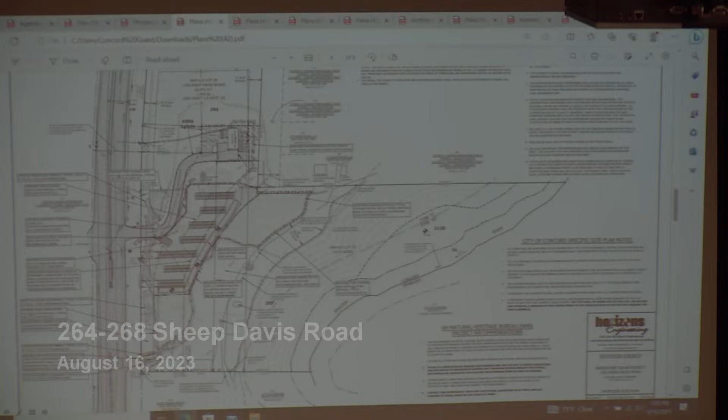In your response to comments, you provided a solar coverage calculation and indicated 5,600. Yeah, that sounds about right, because if you look at the top, that's our building, just under 900 square feet. Scott, scroll the sheet to fill these gaps. Keep going up this way. Other questions from the board?

Jeff: Can you go to the landscape plan for a minute? I noticed along 106 there are some gaps in the landscaping, and I'm wondering if that's something you can fill in, so from 106 you're not gonna really have a sight line of the arrays.

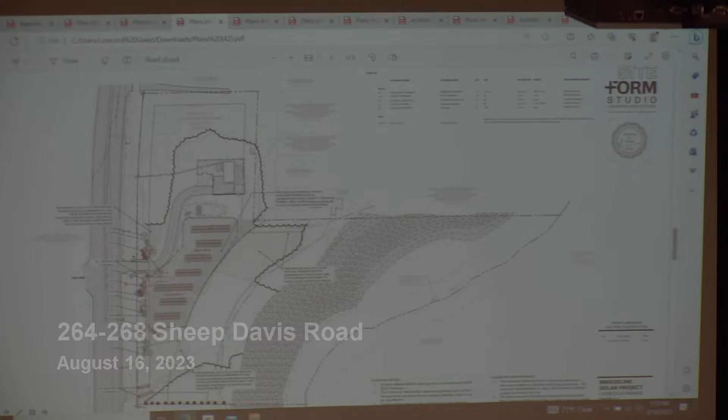Oh, you mean to block it from view when you're driving? Correct. Yeah, that's not a problem - we had planned to put a buffer, just like we have a buffer in front of our building right now. The only other thing I would mention is that technically this constitutes a change in use, so you will have to go back to New Hampshire DOT for a change in your driveway permit.

Because originally you just had the building, but now that you're adding all the arrays, it's considered a change in use. It may just be a simple amendment letter, and you may not have to do much, but that is a DOT road, so they do have jurisdiction for permits as well as the cities.

Okay, we'll go check with them. I didn't know that. And Alex, what was the...

The stormwater runoff that they mentioned in the letter from Pembroke was just that the stormwater review be included and reviewed in the project, with particular consideration given to controlling the runoff from the panels. Was that addressed, or is that in the notes at all?

So the staff has not had an opportunity to review the stormwater report submitted with their AOT application. I don't have great concern due to the flat landscape of that land, but we haven't reviewed their stormwater report yet.

So you don't handle runoff, right? It just runs off the panel and drips onto the ground? It's not channeled away or anything? No. And there's no rock or anything underneath? No. Okay, can I add on to that?

As part of the AOT design, we do have a small swale, right now it's 6 inches, below the arrays. The intent is to grade it towards that so most of the water will infiltrate. So we are meeting the pre-development conditions - we're not increasing any of the runoff. If that makes sense. Okay, that does, thank you.

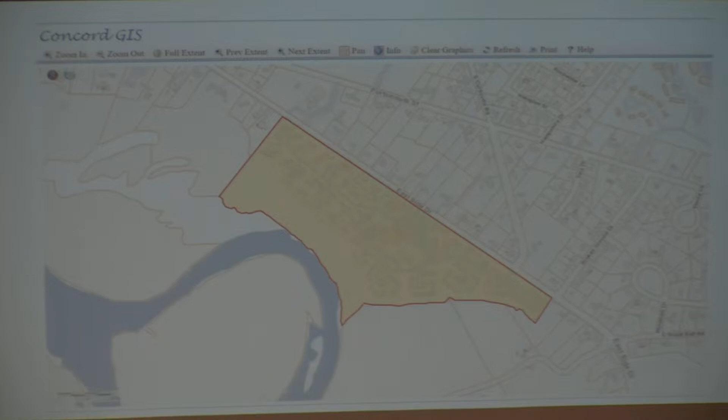Perfect, thank you Mike. So just to orient everybody, if you're not familiar, this is Havenwood Heritage Heights. It's 35 acres located on East Side Drive in Concord. The north end redevelopment took place around 2014-2015, where they redeveloped the entire north end of the campus from the Barrows building, which is basically the center of campus north. Then in 2019, early 2020, we were before you for phase one of the south end. So basically, Havenwood is looking to carry that same redevelopment message through the south end of the campus.

So we wanted to walk you through the master plan. The south end, they were not able to tackle in one large chunk. There's a lot of financing as well as resident management that goes into that. So Havenwood has done a lot of very thoughtful planning as to how they can tackle the south end of the campus. They started with phase one, which was completed in 2021, and those were the 3 buildings on the southernmost corner. Now we are proceeding with phase two.

There's basically a road that runs through the campus, and that's going to remain. But today, the buildings are designed around a central parking lot. For example, the driveway is here, and there's a parking lot in between buildings 38, 39, and 40, and the same thing with these pods. What we'd like to do is continue to provide a streetscape and continue the neighborhood feel that we developed in the north end. So in phase two, this building right here is building 41, which has a parking lot, and we're going to redevelop everything so they're fronting on these roads.

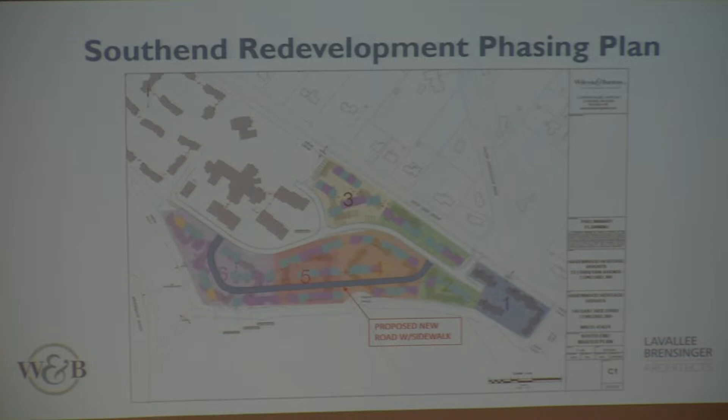So you're going to see on my plans that we're starting to build the beginning of that road in phase two. When we come back through in phase four, we'll build the next portion of the road when we develop that phase, and so on. So we wanted to give the board an idea of where we're going. It's very thoughtful and planned out.

All right, so phase two. There are 3 buildings that are part of phase two: buildings 41, 45, and 46. Like I said, they all have frontage on that main road. We are reducing the number of units from 17 down to 13. Building 41 will have 5 units. Buildings 45 and 46 will each have 4.

There's been a lot of detailed planning that's gone into each of these buildings in terms of providing zero clearance at each entrance, front and back, and providing as much daylighting as possible. The detailed elevations really call out those features, but I'm going to walk through what's really important on the site.

Each building has a front porch. Each building has a garage and 1 parking space in front, so each unit has 2 dedicated parking spaces.

In the rear of the building, each unit has either a patio or the ability to create a screen porch. You'll see I've highlighted these - the blue are the individual patios or screen porches. In the center of each double building is an entrance for maintenance folks, specifically designed so they can enter a separate entrance and go directly to the basement without walking through the resident units. That's been very well received by residents of the phases already completed.

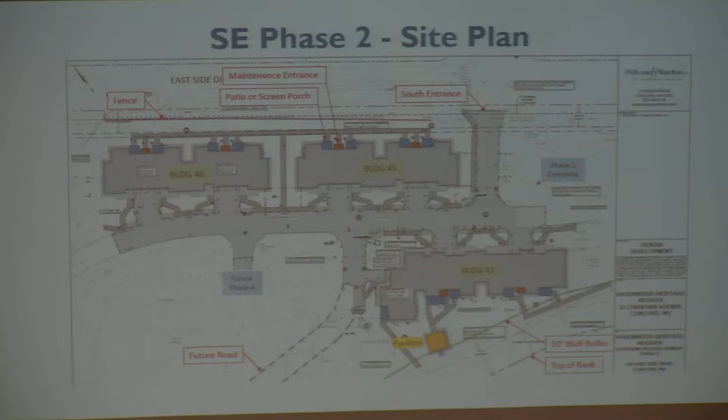And this is the beginning of that spur road that we talked about. We're bringing utilities down it. We've planned for it in all aspects of the project.

Stormwater, we are reducing our runoff in the post condition. We're looking for every opportunity to reduce the amount of stormwater flowing out to the city system. Admittedly, we don't have a lot of room underground to build a large gallery.

In phase 1, we were able to disconnect completely. The main road is still going to be connected, but we are building 2 infiltration galleries flanking Building 41. This one has been upsized to account for runoff from this future road.

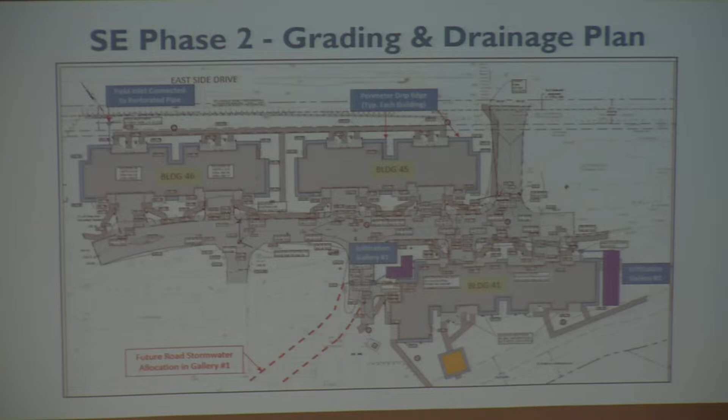Each of the buildings is surrounded by a perimeter drip edge, so as much as possible we're infiltrating all of that stormwater. You can see a drip edge will go around the pavilion, so there'll be no runoff from that heading towards the bluff. It will all be infiltrated on site.

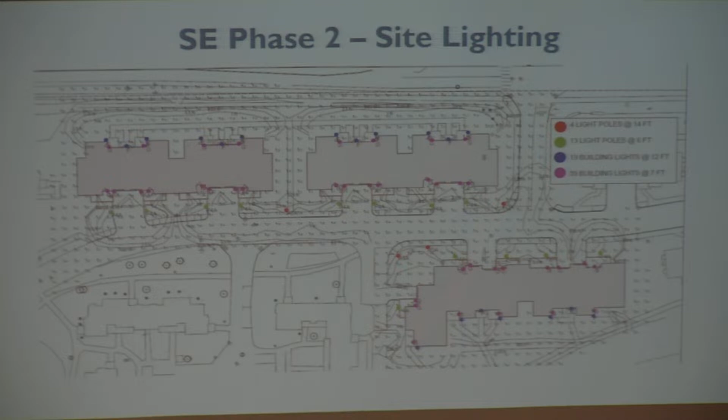There are small lights that you see in blue at each of the doors, sited on the porch or onto the patio. And then there are some other building lights. They are all consistent with the city's lighting requirements.

There's a detailed landscaping plan. We can go through it, but certainly the idea is for it to replicate what was installed in the north end and in phase 1. We have the same landscaper and the same landscape architect on the team, so all of that continuity is incorporated into phase 2.

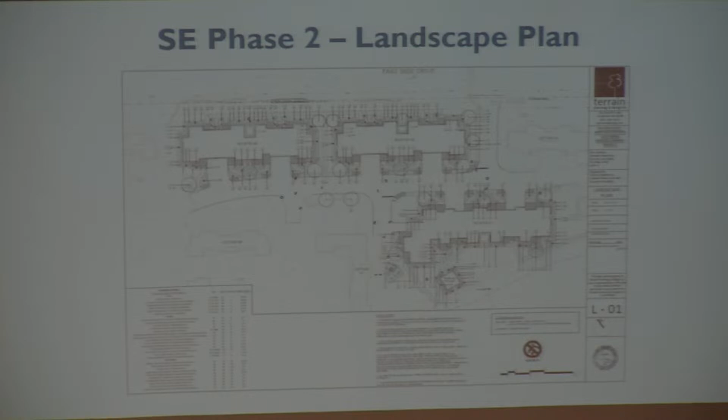As we mentioned, we do have the conditional use permit for the sidewalk. While we are putting in new pavement, we are reducing the total pavement in the buffer by about 95 square feet. We request to defer the curbing along cottages 39 and 40; it would be put in during phase 4.

And we request a waiver to not do a color rendering that showed landscaping. Lavallee Brensinger did a wonderful job of providing colored renderings, and they do a wonderful job of depicting the building, but they don't show the proposed landscaping.

I just wanted to bring to your attention that the project was granted 2 variances. The buildings are separated by 30 feet where 40 is prescribed; they are fully sprinklered. And lot coverage is allowed to be up to 65%. At the end of phase 2, we will only be at just under 48%, so we're still below that.

But we have it planned out, and with the extent of walkways, the buildings are a little bigger. We count the stone drip edges as lot coverage, and we did get relief for up to 65%.

And with that, I'd be happy to answer any questions.

Looking downstream to phases 4, 5, and 6, I'm just trying to picture it using the colored document in the supplemental packet that shows all the different phases. Are you going to have fewer units? Yes. Bigger ones? Yes, they're all a little bit bigger in order to accommodate a garage as well as a basement, and we do reduce the units slightly.

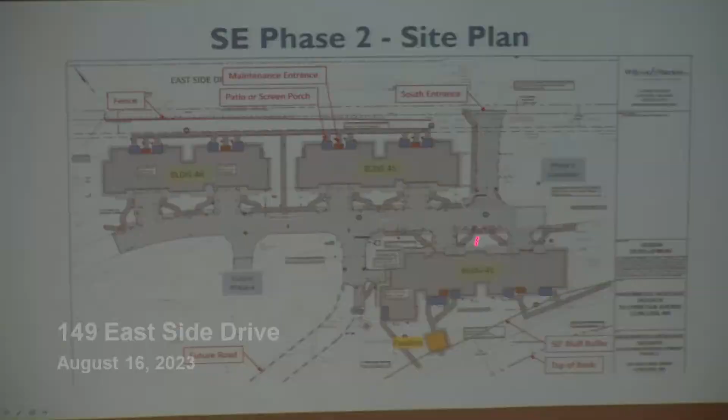On your grading plan, the two ramps in front of building 41, next to the two driveways, it appears the grade at the curb and the grade at the bottom of the ramp make the water drain toward the ramp rather than toward the road. Can you tell me which ones? I'd love to check that. Around station 0 plus 25 right and negative 25 right, the grading at the curb line is actually higher than at the bottom of the ramp, so it looks like the ramp is pitched back toward the sidewalk rather than the other way. Just work with engineering to make sure that's fixed—I'd hate to see you build it and have a puddle. Yes, as would Cobhill. I will make sure that's corrected.

And that's it. Other than that, I love the buildings that are out there. I like what you've done—I think it cleans it up.

It looks nicer, so I applaud you for continuing that plan.

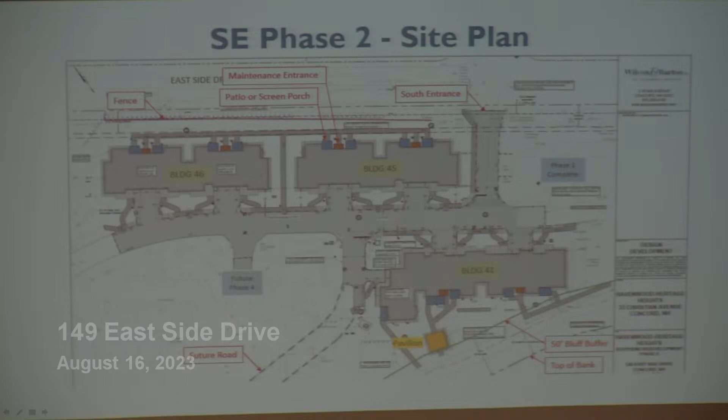I saw a note in the system to provide spot grades for the proposed pavilion site. Yes, we'll do that. The pavilion is the building right behind Building 41, adjacent to the perimeter walkway. It's a 20 by 20 pavilion. We'll make sure there are spot grades around it, but it will have a drip edge all around it, so it will capture all of the runoff from the roof.

Okay, I see another hand. No? Any member of the audience have any questions or concerns about this application? No? Seeing none, we'll close the public hearing. Thank you very much for your testimony.

Okay, so there were lots of technical review comments, and I think most of them have been addressed or are in the process, right? Yep, the applicant did provide a resubmission between the DOC and now, which took care of a lot of them, and anything remaining on the report would still be yet to be resolved.

As mentioned in the comments regarding ADR, in your packet under the architectural design review comments, ADR recommended approval as submitted. The committee did recommend the applicant consider adjusting the sidewalk along East Side Drive to have some curvature to it. I think we heard testimony why that's a bad idea, and unless there's some discussion about that, I'm going to say we strike that from the recommendation for ADR.

All right, so let's move on to our recommendation, section 6, 6.1, determination of the findings of fact. We'll use the findings of the information that was presented here tonight, the documents and content in your packet, as our findings of fact.

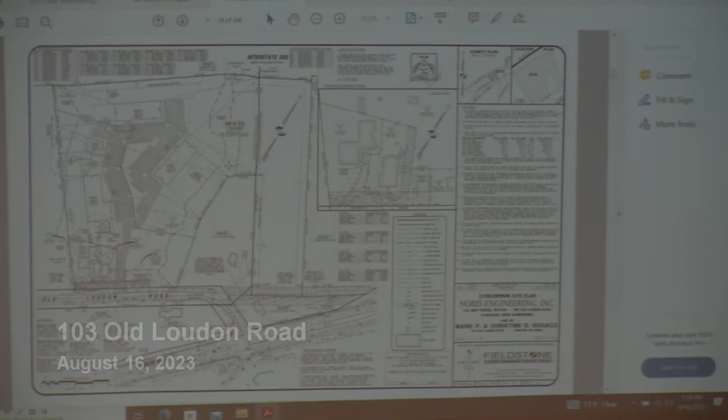So our site is located at 103 Old Loudon Road. Currently this site has three existing buildings: a small residential house, a barn which also has a small apartment to it, an in-law apartment as they call it, and another barn to the east. Our site has a brook that runs straight through the middle, down this way, and goes out under a culvert through Old Loudon Road.

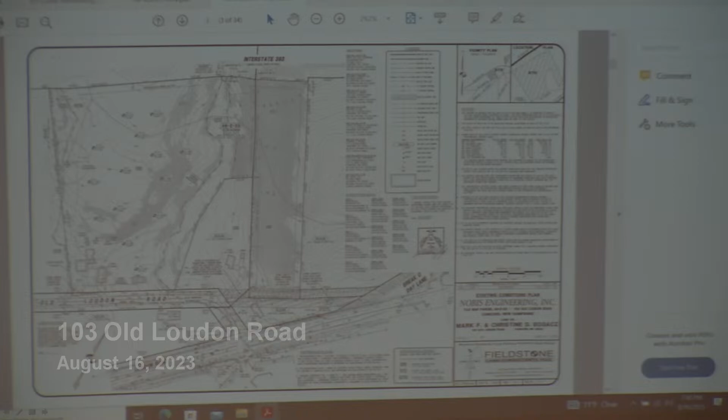The entire site is kind of this awkward shaped little thing with a little cutout right here. We are also bounded on the west with another wetland area that has a 50-foot setback, and the brook that runs straight through our site has a 75-foot setback.

So we are proposing multi-family dwellings. This will be a phased project. The first phase will be building A, which is this L-shaped building, and building B, which is the clubhouse. Phase 2 will be building C and building D, which are both 30-unit buildings. The three existing buildings near the street are going to remain as is. They are historic, and we are proposing to do land condo units for these.

We have an existing proposed driveway going up to our site, circling around, and going back to Old Loudon Road. We will be removing one of the existing driveways to the houses on the east side to provide separation between the driveways.

Also, just want to mention that the first phase is 38 units. Those will be affordable units, with 10 of them being market rate, and the balance will be affordable. In the second phase, the 60 units are all affordable housing units within that area.

This project is somewhat similar to the project we were here for back in 2021, Rail Yard off of Langdon Avenue, which is under construction now and is planned to be, we're in the process of leasing it up now. We should have occupants in that one probably end of September, first part of October.

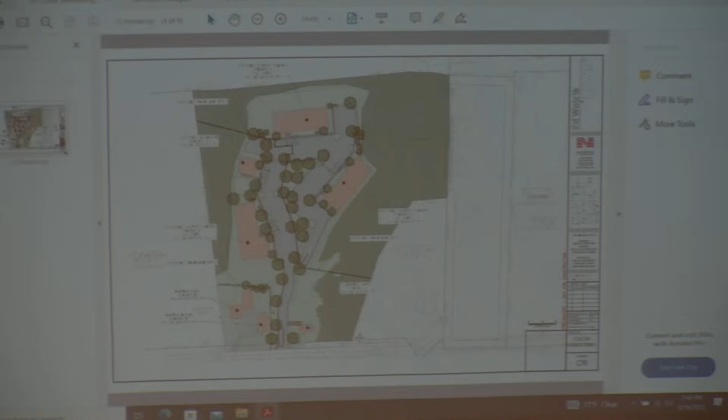We are also asking to pay a fee in lieu of constructing a sidewalk along the frontage per section 21.02. It would be ideal to have sidewalks connect to the main sidewalk on Loudon Road, but there is a significant brook that runs through our site and culverts that cross Old Loudon Road, which create an obstacle to creating a sidewalk, and we don't know which side would be best for a sidewalk in the future.

I also want to point out that we went to the zoning board and received 2 variances. The first was Article 28.21.4J to allow multifamily dwelling units in this district. The second was Article 28.4.5 to increase the density to 21.07 units per acre, where 12 units per acre is allowed.

I will briefly go over the site plan more in depth. So like I said, we have 3 buildings: 38, 30, and 30, with a clubhouse. We have a playground area next to the clubhouse, and associated parking spaces all along. Dumpsters are over by building C and D. We have sidewalks that connect all of these spaces to the clubhouse and all along the driveway.

This is our turning motion plan. This just shows the Concord fire truck turns that go in and out of our site.

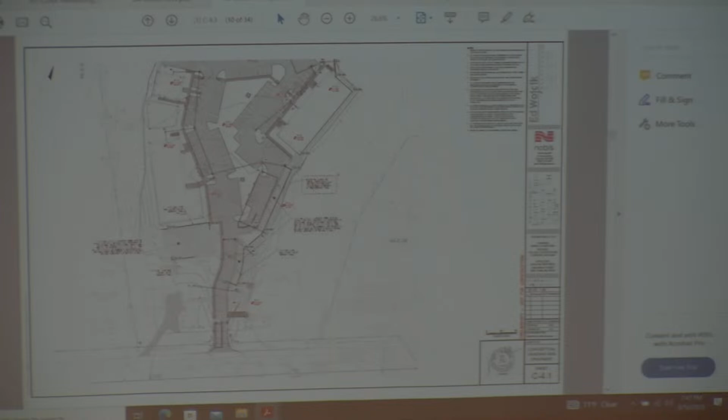For future grades, for the additional 49 parking spaces with our conditional use permit, these are designed to be porous asphalt, and we will be proposing multiple retaining walls along here.

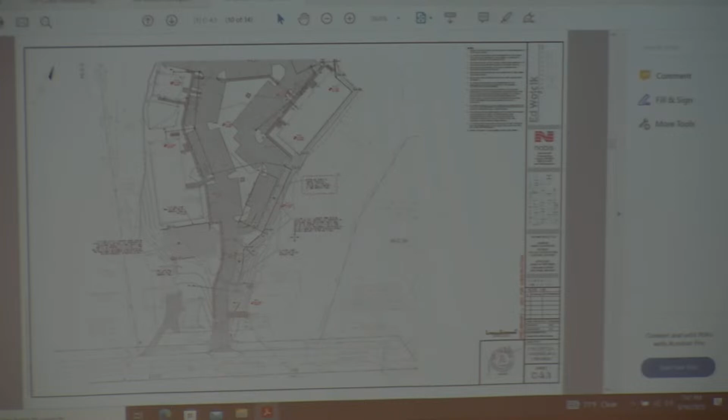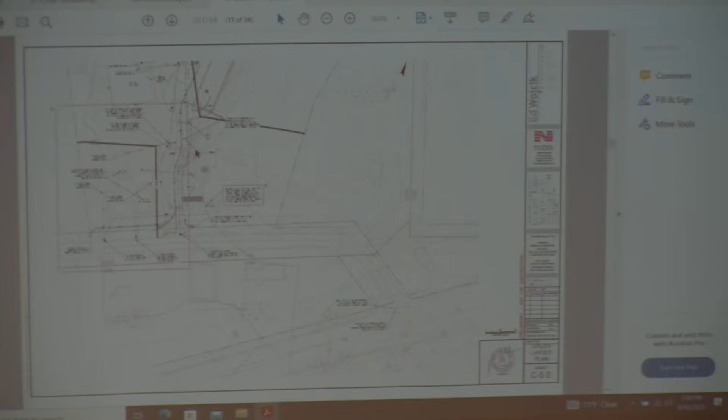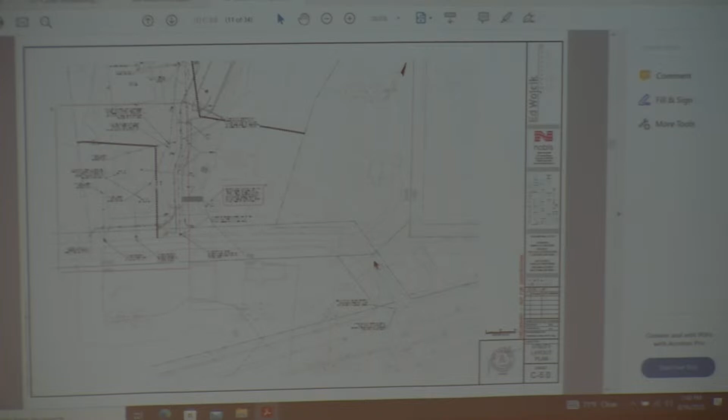For the utilities, we are providing connections to city sewer and water, as well as electric and gas, with propane tanks for gas. All the condos will have separate connections for sewer and water. Since there is no existing sewer within Old Loudon Road, we are proposing a force main to go from our site to the existing sewer manhole within Old Loudon Road. This is due to the fact that there are multiple culvert crossings in the road - an 18, 12, and 30-inch culvert crossing - which prevent us from doing gravity sewer.

Then I'll go to the landscape plan.

And here is the landscape plan. We are proposing large shade trees all around the perimeter of the parking lot, inside the landscaped areas. And we are also providing a tree barrier screening between the existing houses to remain and the proposed development.

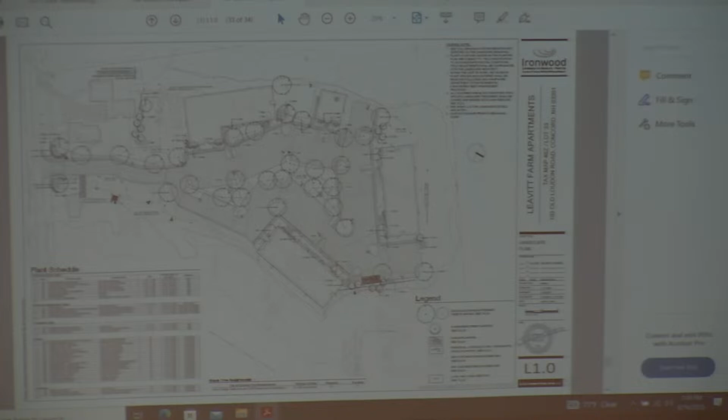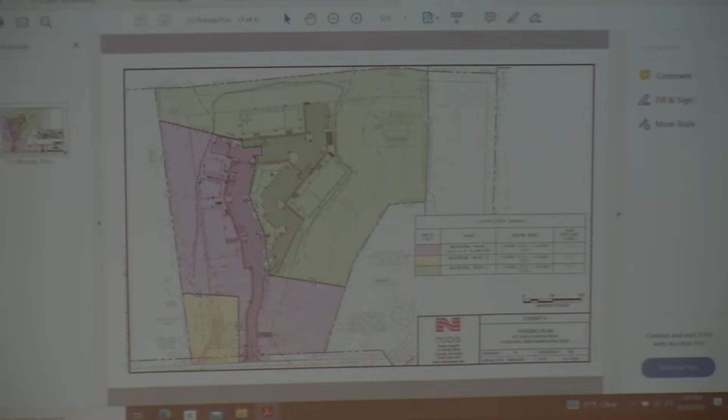I think that's it. Here's a better image of the phasing plan that's in color. So the purple is phase 1, green is phase 2, and the yellow is phase 1A, which will happen within phase 1, and that is the removal of that existing driveway to the east and connecting those two buildings to sewer and water.

And there was also a comment made about views from I-393, if that was going to be an issue, and here's a graphical depiction of the road. I don't know if I can zoom in, there we go.

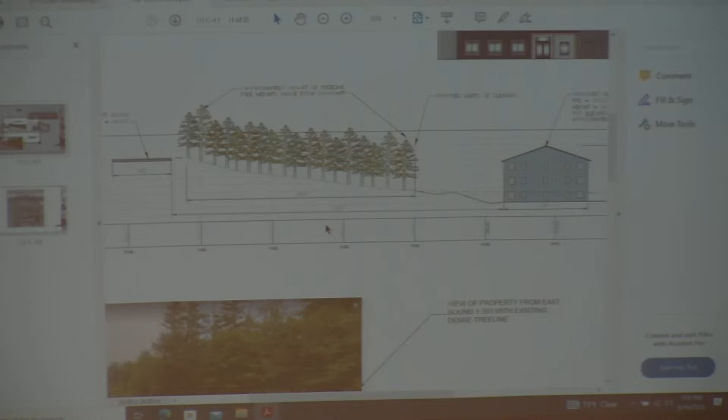So I-393 is up at approximately elevation 404. This was using GIS information. And there's a significant tree buffer between I-393 and our proposed development. There's approximately 160 feet of tree line that is going to remain. And these trees, as shown in the photo below, range from 20 to 40 feet throughout. It's a very densely forested area. And then this shows our proposed building C, which is this building right here. So there'll be a nice buffer, and these people will have really nice apartments looking out at the woods, I think.

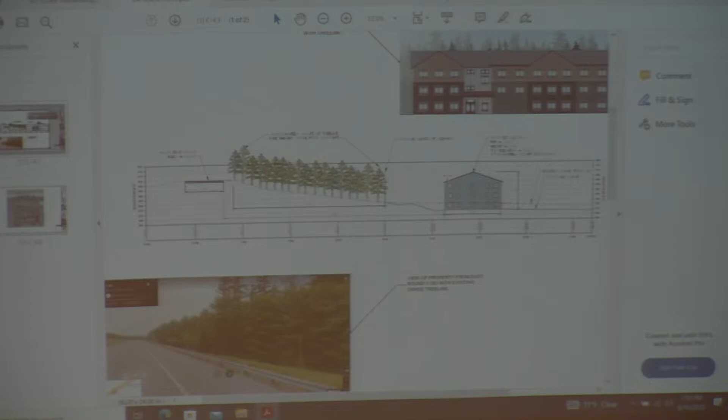Okay, so yeah, that's my spiel. Great, thank you for your testimony.

You said 93, do you mean 393? 393, sorry, yes, 393, yeah. See, you said 93, I'm sorry. Yeah, if you see 93, I'm looking at the wrong map. Looked at the wrong map.

And I had one follow-up for staff. The connection to city sewer, is this involved with the capacity issue up there? Yes. Okay, thank you. Well, it's adding to the capacity issue up there, but they're saying that they're gonna have to pump because they can't do it with gravity. Right, we've got a bigger capacity issue. Those are two separate issues. Yeah, two separate ones. I wish it was gravity, but unfortunately, we have to go with a force main.

Yep, hit it, Jeff. So on your turning movement plan, I'd like to see you have a fire truck making a left into the site and a right out of the site, because the station on Loudon Road, my guess is they're gonna come in at the other end of Old Loudon Road rather than having to go through all the different signals to get down here. You only show the left in, the right in and the left out. So if you could also show the other side, because it may affect that other radius on the other side.

Okay, okay. I do have a couple of questions. There is two sewer structures, or there's a sewer manhole, and you show two sewer lines that connect to the existing buildings. Does that need some sort of easement, or is that covered in the condo docs, if that sewer manhole's on one property but it's connecting sewer lines to the other property? Oh, good question. You did put a comment in there about that. Okay, I might have missed that. Yeah, those separate buildings should have separate connections to the sewer main in the street.

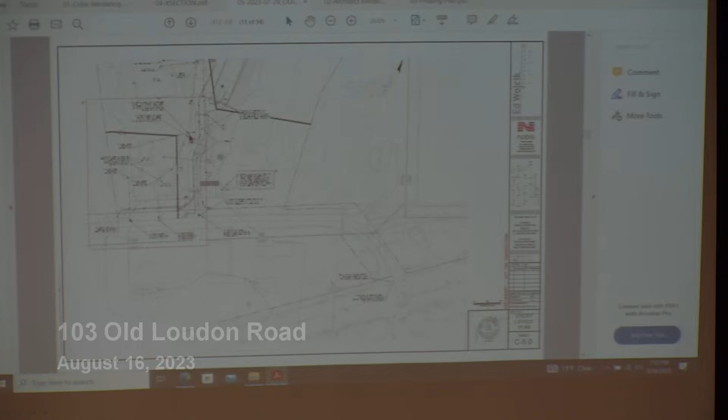The separate buildings have connections to sewer manhole 5, which is the pump station. So wouldn't that be crossing private property? Yeah, is that what they're saying, that there would be easements, cross easements for the utilities? I think that's what I'm asking. Okay, yeah, that is correct, which is probably where you're going too, yeah, that's right. But you're absolutely correct, there should be an easement there. Yes.

Yeah, okay. What is the profile of the driveway coming off the road and going up? Because I was having a hard time from the grading plan trying to figure out whether you're going straight up from the road, dipping down from the road, then going up. Because your first set of manhole, catch basins is 100 and some odd feet up the road. Are they at a low point?

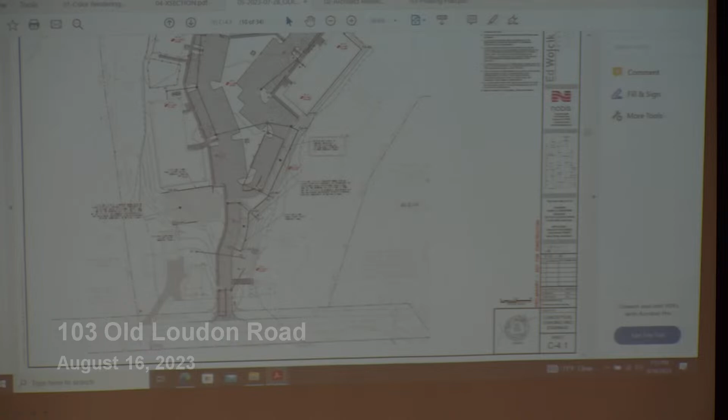So we have, the road goes up all the way. Is that what you're asking? Yeah, so I'm trying to understand, there's two catch basins down here and two right here. Right, so you have the water for that last 100 feet that's basically sheet flowing into the Old Loudon Road. Yep, and that'll just sheet flow down. It'll sheet flow all the way to the road, or is there a ditch so it stays on the side of it?

If you're saying it goes all the way up right now, that water's gonna go right out into that road. It's on a hill. It should be a ditch. Okay, I'll make sure it's a ditch.

The last thing is, I know staff supports the whole non-sidewalk issue, but did you show that it physically can't be built, or are you just saying because of the culvert it makes it difficult? Because I went out there, and on that same side of the road, with some work, it is possible to put a sidewalk in. I know we've really been pushing for sidewalks on other developments for the last year and a half, so I'm wondering, was something provided to prove it can't be done, or it's extremely expensive, or what?

No, I don't think it cannot be done. I think it can be done in some fashion. There are certain areas that had pinch points that really made it difficult.

We had our meeting with staff from all the departments, and one of the questions was building a sidewalk to nowhere, because you get to Loudon Road and there's no sidewalks down there. So you're going down to a place where there's no sidewalks, and we're not sure if or when they're gonna have sidewalks. So you'd have a portion from our door down to Loudon Road that really has only one house off of it that can feed to it, other than us. The rest will be within the road areas.

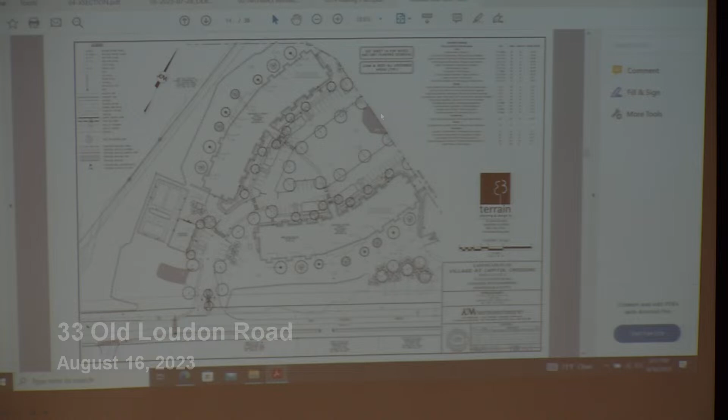The main one was the landscaping, in my opinion, where we had taken out the existing house. We had not shown the landscaping in that area to fill in the buffer that's there, so we've shown that now in the bottom right-hand corner here. Also, as was brought up by Susan, we had kind of built everything up and took out the trees, but we really didn't do anything behind the units. So we had our landscape architect detail behind the units as well, to add a little more green to the back of the units.

Also, the sidewalk that was just discussed is proposed down and along the south side of the property, the south side of Old Loudon Road. Again, I think that makes a lot of sense for the future. I travel this road a lot by bike and walking. You keep the internal loop, and you don't have to do any crossing of the roads as you make your loop on Old Loudon Road. So I think this side of the road makes the most sense.

It makes the most sense for us because the commercial entities are on the other side of the road, so why wouldn't we put the sidewalks there? We could tie into them from that standpoint and have access to them, I guess, is how I would look at that.

As far as the driveway entrance, that was kind of interesting in the last one as well, because there was a question about the fire truck. When we ran the fire truck out that right turn lane, we need that 56-foot radius to not cross the center line of Old Loudon Road there, so we're requesting that waiver. If we did remove the center island, it would reduce our waiver down to 48 feet instead of 56.

But we believe the design plans in front of you make the most sense for a development like this. We have wide lanes on both sides, separating the traffic from each other as they're coming in and out. Obviously, we're an age-restricted development, so we felt that's advantageous for our development here.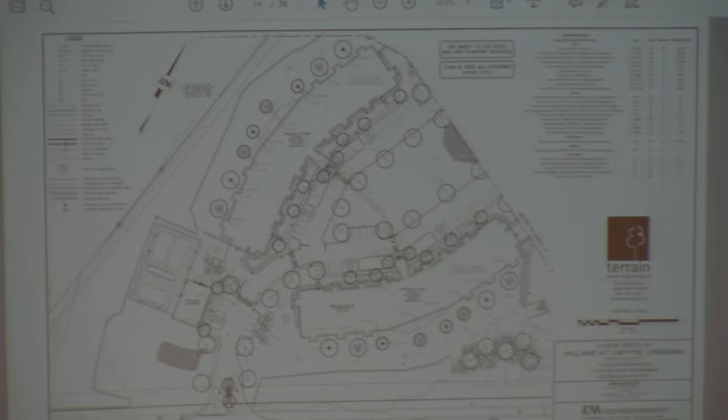The separation waiver is just for the front detention pond that was sitting right here. All the other ones have the 4 feet of separation. But if you take a look at the original grading plan from the existing conditions plan, this is already a low depression right here in this area. So again, we've met the requirements of the AOT. We're working on our AOT permit, but staff is willing to work with us on that, and we're asking for the one waiver for that in the front.

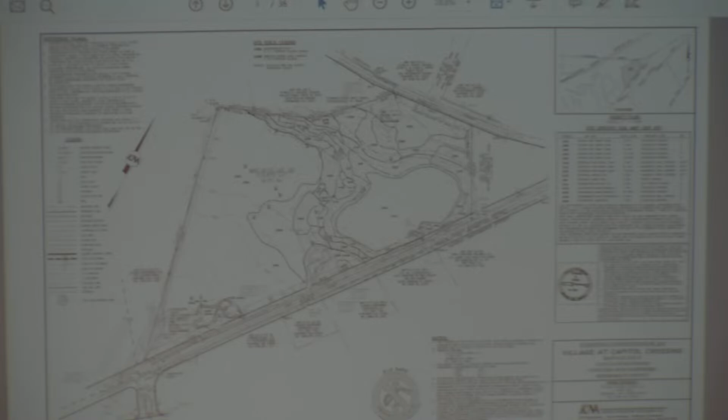So the three waivers were for the sewer, the separation, and the driveway width. As far as conditional use, I think we talked about last time, that's for the ponds that go into the buffer. We met with conservation, they were good with that, and signed off on the design that was there.

We don't really have a lot of other concerns. We've been working with engineering. Obviously, the sewer concern came up the other day, so we've got to continue to push that forward from our end. But I think we've been here for a few hearings and gone through a lot of stuff.

I appreciate that you put some trees back there. Your buildings are so big, I think it would be better to use shade trees and not the crab apples. I also noticed you've got some shrubs around the base, which are just kind of pretty. If you want to spend more money, get rid of those and add more trees. That's going to make the biggest impact, especially on that side, and I'm sure people who live there will want to put in some perennials or something. But yeah, it'll be better to have real shade trees in the back.

So I do have a couple questions, probably not what you're expecting. On your site plan, you have a bunch of signs in and around the main entrance. The W11-2A crosswalk signs are no longer acceptable by MUTCD — they've got to be the 11-2, without the extra fake crosswalk markings. Also, stop signs should not be mounted on the same post as a keep right sign; the stop sign is supposed to be by itself. I think it would be preferable to show the R4-7, which is just the symbol for keep right as opposed to the wording — it's better understood by most people.

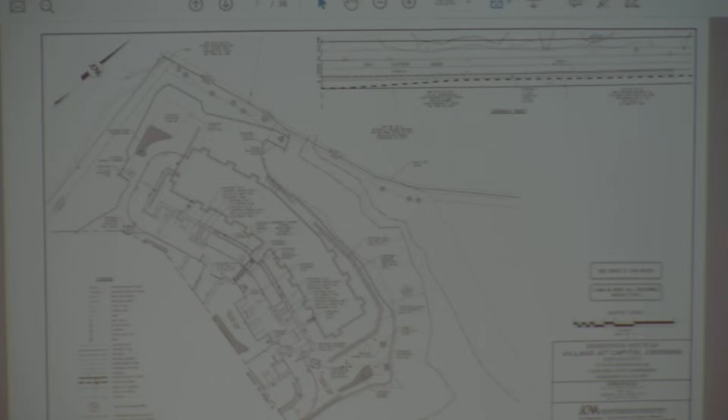I didn't see snow storage indications on the plan — did I perhaps overlook that? On our site plan, we typically show those in areas of the stormwater up in this area here, but it doesn't look like it made it onto the plan. So you're showing snow storage in your stormwater areas? We typically show it in the sediment basin at the entrance to them. I don't think that's allowed, is it? I'll work with engineering to make sure snow removal is in the correct places.

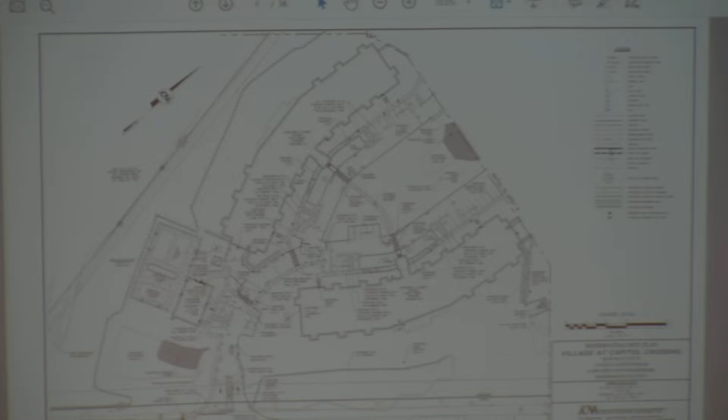Believe it or not, I don't necessarily have a problem with your driveway entrance with the median in the middle — I do think it provides a little easier turns. I will still have the disagreement though.

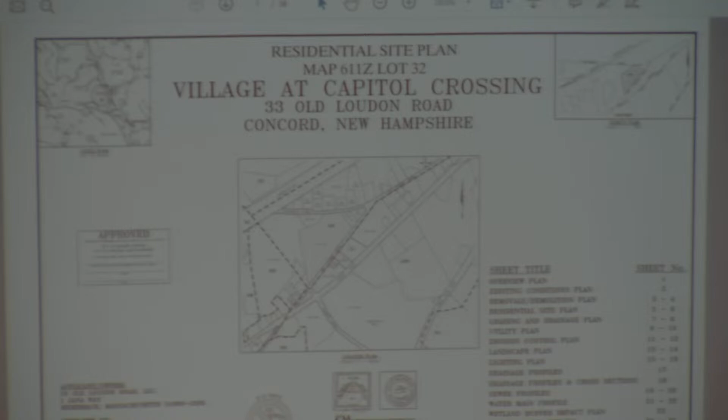I don't think this is the best side for this sidewalk. I know what you're saying about the inner loop, but the remainder of the developable property and lots is on the opposite side of the road from the commercial, the same side as yours. So if those lots continue, we're going to need more crosswalks down. Let me show you where I'm talking about — the entire section between Old Loudon Road and Loudon Road. You only have these two houses right here at the end, but if you continue up around, if those houses get bought, the other stuff being commercial is probably not going to get bought out. What I'm saying is the available property that could be bought is on the other side. We talk about entrance access to the commercial lots, but those all have landscaping with a berm and a fence. I'm not going to disagree with it if that's what staff and engineering have already chosen, but to me it doesn't seem like the right place to put the sidewalk.

I think you'd want to put it on the side that has the residential and other uses, as opposed to commercial, which is using Loudon Road for their sidewalk. So I think at Portsmouth Street might be a possibility for crossing, on the other side — that's something I agree with you on. At that point, when you get to Portsmouth Street, it's a logical location to get to the other side where all that vacant land is.

On this one, we also brought it up on the inside with the Chipotle situation, continuing it to the very end. I agree with that piece you have from your driveway heading back, but it's the piece heading east from the driveway that I don't necessarily agree is the correct location — that's my personal choice based on my experience.

Part of that consideration was the wetlands that really abut almost right next to Old Loudon Road, so getting the sidewalk across that on the north side would be difficult. The conceptual plan was crossing at Portsmouth Street to get to the north side. I'll agree to disagree, but that's okay.

Just for a moment, remind me, did you have to go to zoning? We did go to zoning for length of the building and height of the buildings. Right, okay, it was yours, the length of the building, okay.

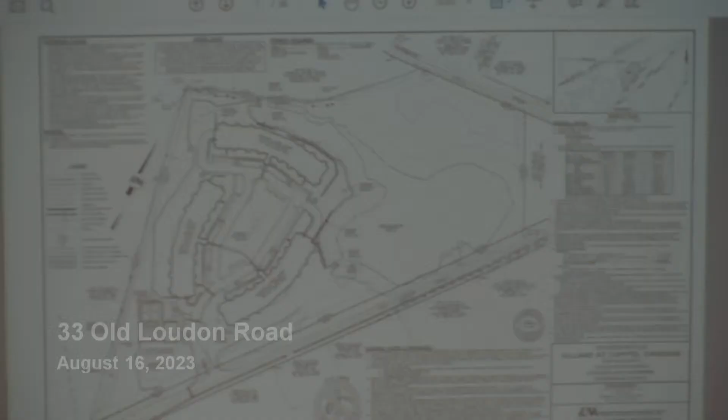I don't disagree, I don't want to go against what he's saying, but our wetland, if you look up in the corner here, the brook he's talking about - I looked at the city GIS before the meeting, and this wetland continues and goes up like this. So I definitely wouldn't put anything on the backside of that slope for them. Like Heather said, it would have to be on our property.

It would just be maybe 5 deciduous trees or something in this area if that's the board's concern. But if you look at the Google Maps tree growth in that area, it's a pretty established forest. Just so you know, this is the cell tower right here, popping out above the trees. So they're seeing this no matter what, and that's not on my property.

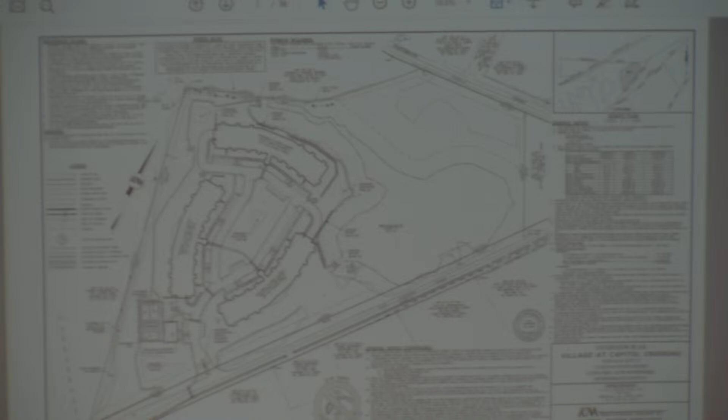We work with everybody, we're not trying to be a bad neighbor. If she comes out to you guys, I think Heather made the great point that if she had a problem during it, these guys, Nick and Jim, would come and have a conversation. Definitely would work it out, I think.

But I do want to pick up on Heather's comment that the neighbor didn't come here to express those concerns themselves after the hearings, and we're sort of imagining that they've got concerns that need to be addressed, but we're just kind of guessing, right?

Excuse me, Mr. Sargent, please, I'll let you up in a second. Okay, yeah, thank you for that.

I'm not suggesting that it be a condition. I think Matt presented it well as being a good neighbor and having the conversation, and we'll go from there. Thank you very much, it's these guys for sure. I have nothing else to ask.

I'll just note that when they first came, that was one of my initial questions - what's the grade difference, and will this be seen from Portsmouth Street? So we did have those conversations, and we looked at it from a staff perspective.

Okay, thank you very much. Mr. Sargent, you had a question? Yes, please come forward. I'm going to let these gentlemen go.

Mrs. Phillips is not well, and her son would have to fly in for a meeting, so that's why they can't be here. And I know them fairly well.

I thought I'd bring it up, being a landscape designer - don't look at my house - I thought I would bring it up to see if something couldn't be done so that her view from her place wouldn't be this huge, long building. Even if the elevation's different, you're still going to see the roofs and a significant portion. I thought the easiest thing would be to stagger some white pines at the top of the bluff to eliminate that problem. It wouldn't be terribly expensive.

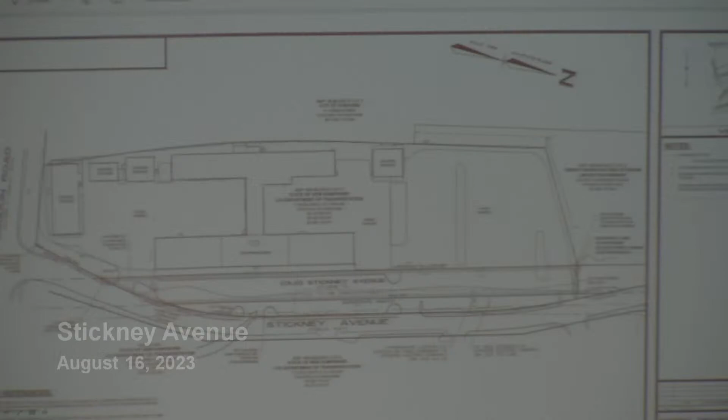Sorry, Pete, you must keep getting hit in the back of the head with this. It's this area here, so right now, the plan that council took action on stops here. This whole area is still city right-of-way. They're asking to have this entire thing discontinued, this being their access just over the property line. As part of their approval, they gave the city an easement along this frontage and an easement along their frontage for the Merrimack River Greenway Trail.

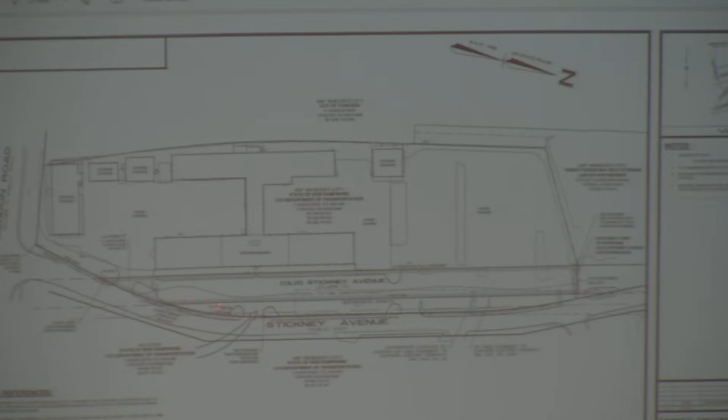Some staff had asked if they could work with the state to get us an easement along this area to continue. Right now we have an easement all the way up to the edge of their property. So the question was, can they work with the state to get us the easement the rest of the length of their property? All parties involved seem to be amenable to that. The state's been working very well with everyone, and everybody's on good terms and working together.

So that's what I handed out to you, and I have language written for the recommendation to council, which basically says that subject to them working with the state to get an easement on that piece of property, we recommend that city council release the right-of-way. So you're just looking for a recommendation? Yes, council takes action and the board makes the recommendation.

I think it seems reasonable. Yeah, it does seem reasonable. So what do you need from us?

Just a request that city council... do you want to base it on John Cronin's message here, or the way he wrote it? I wrote some language there. Let me just transition back over here. Recommendation to council - I didn't see that, where's that?

Revised recommendation to council: recommend council approve the release of the right-of-way subject to 11 Stickney Ave property owner securing a 5-foot easement with the state along the frontage of their lot, in the location indicated on the plan presented by staff during the 8/16/23 meeting, for the purpose of potentially expanding an existing sidewalk in the future to accommodate the Merrimack River Greenway Trail.